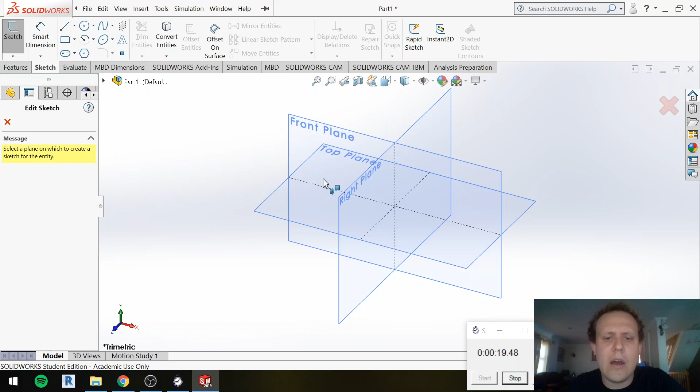I'll start with a rectangle. This will be my front and back. Oh, no, I don't want to do it on the front plane. Let me exit the sketch. Okay, so again, I'm going to do a rectangle. I'm going to do it on the side, the right side, because I'm going to make this my front and back. Jump normal to, draw my rectangle, dimension it. So this should be 2 inches. And this should be 1 inch.

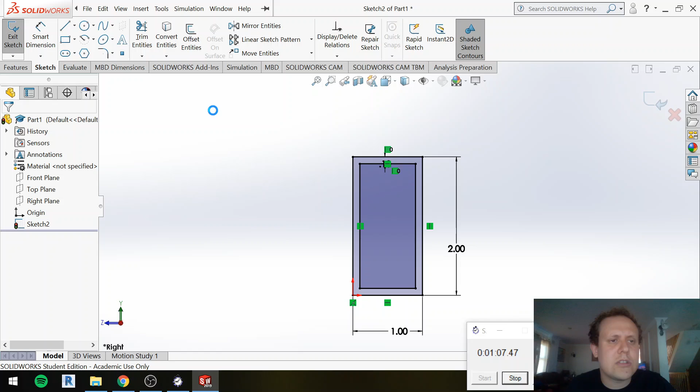And then I'll offset the rectangle by 0.1 inches because that is the wall size. And I want to invert that. So reverse, check here, and there we go. I have my inner piece, and then I'll extrude. And since it's the front and back, I'll make it 30 inches long.

Okay, and then I have kind of the base of my VersaFrame, and then I want to put holes in it. Oops, that's not what I want. Jump to the top view. I want to put those VersaFrame rivet holes, so I'll draw a circle. I'll sketch on this plane. I want it to be in the middle here, so let me zoom in a bit. Snap to the midpoint.

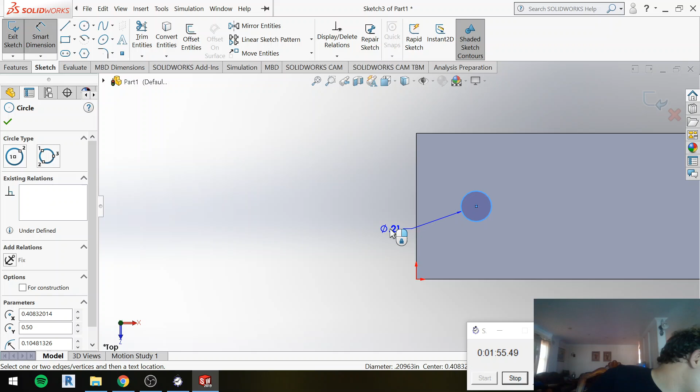Dimension it. I have written down here the size of those holes is 0.16 inches, and then they should be an inch from the corner here. It could be an inch or half an inch depending how you cut it. I'll make it half an inch because it'll just make the other end line up nicer. Half an inch. And then I want to make more of these before I extrude it through.

I'm so used to controls for other programs, I've forgotten how to pan. But I remember my hotkeys, which is good.

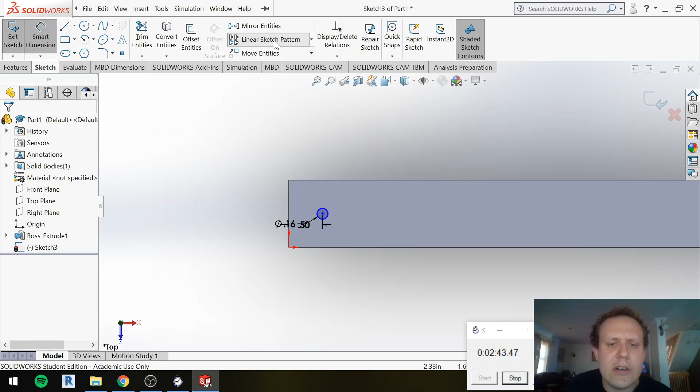Okay. And then I want to pattern this. So linear sketch pattern. I'm going to pattern it just like this. I'm going to space them 1 inch apart because that's what it is on VersaFrame. I'm going to have, I believe it's 29 instances. Let me just zoom out so I can make sure it goes all the way to the end. Oh, no, 30 instances. Yep, that looks right. Spaced 1 inch apart.

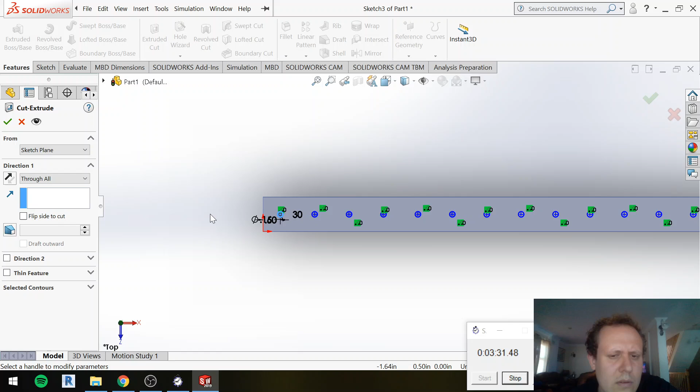Looks good. Check. And then what I'll do is I will extrude. Ooh, no, I don't want to extrude. I want to extrude cut. So I want to go to features, extrude cut. I'll just do through all. Let me rotate to make sure it's going through. Good. And it selected all of them. Excellent. I'll hit check. And then my front VersaFrame is donezo.

Okay, so I'll save that. I created a folder for myself here. What did I call it? SolidWorks DriveTrain. Let's make this part called 01 front and back rail. Okay, save that.

And then my side rails are going to be pretty similar to this. So let me also just kind of work off of this as I create my side rails, just as a time saver. So I'll save this as 02 side rail, or left and right rail, whatever we want to call it. So now I have two files, which is very convenient. I can go to my desktop and see that I have two separate files, and I'm working on the left and right rail now. So it's just like an easy shortcut.

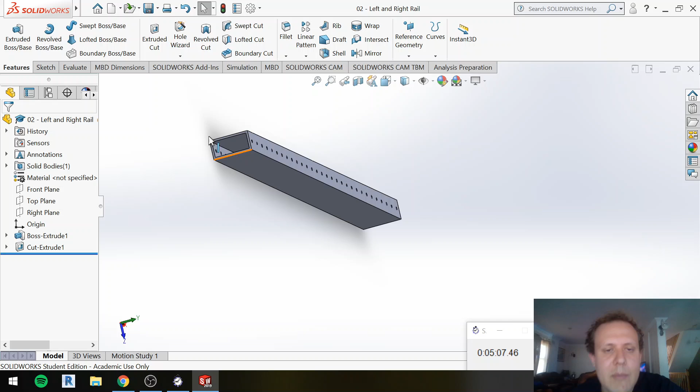Okay, now I need to shorten this to 28 inches because I'm going to have my front rail up here and my back rail here, and the side rails fit in between, so it's going to be 28 inches long. So let me cut off an inch on each side, or just cut off 2 inches from one side. So sketch, rectangle on here. Ooh, that started in the wrong place. Start that again. Up here. Dimension this guy.

2 inches long. And then go to features and extrude cut this through all.

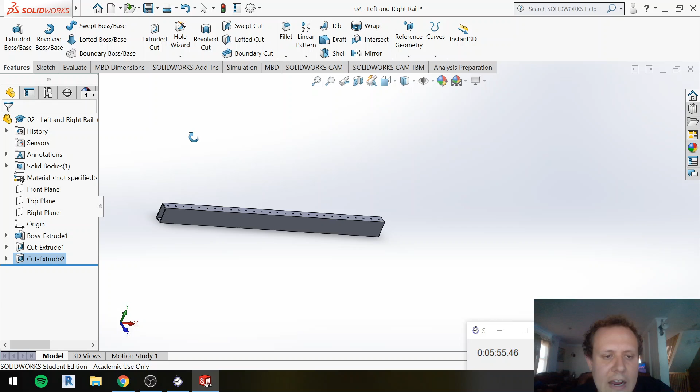Okay, now my side rail length is good, but I need to put bearing holes on the side here. So let me draw some circles. I'm going to need 3. I'm going to make a 6-wheel drive. So I'll draw 1 to start and pattern it. And the size of this hole should be the size of a bearing hole, which is 1.125.

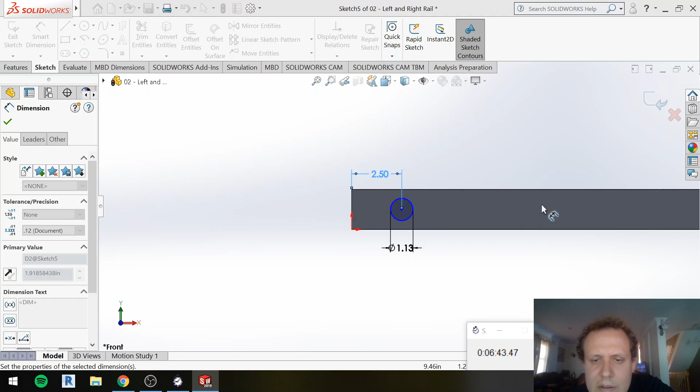And then I will space it. My plan is to use 4-inch wheels for this. So I'm going to need to space this at least 2 inches apart. I'll give it a little extra, so I'll set it at 2.5. And then what I'm going to do, I could linear pattern this. I could mirror to the other side.

I'm going to draw a construction line because I want to do that here. So right in the center, draw a construction line. So that has no impact other than it's a construction feature. And then I will mirror this guy about this line. So I have a hole on the other side. And then I'll just draw a circle here.

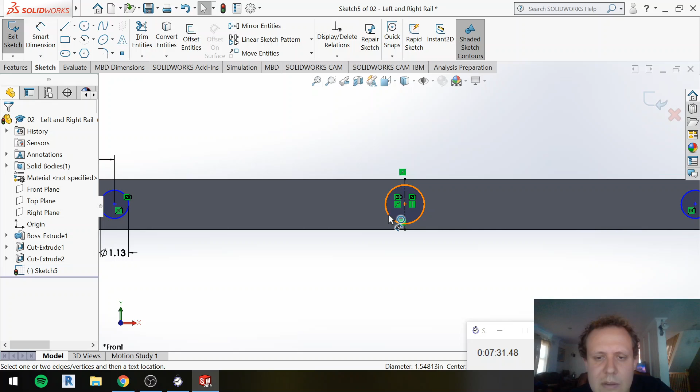And then I would actually like these two to be equal. See if I can remember how to do this in SolidWorks. I'll just set its dimension. I forgot how to do it in SolidWorks, unfortunately. Set all of them to be equal. Okay, cool. The mirrored ones will automatically be equal. Extrude, cut those 3 circles. They're all in one sketch, so it'll be easy to cut through all.

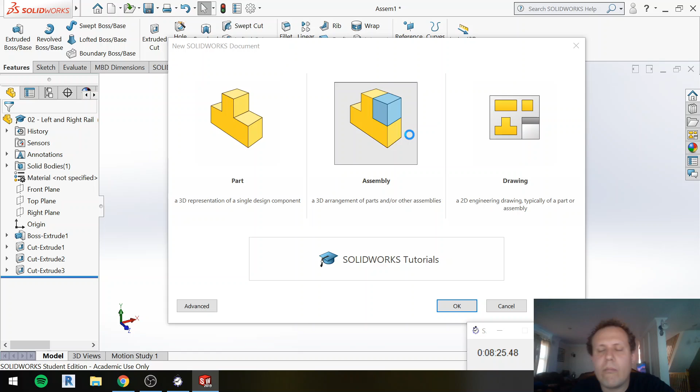All right, so I have my side rail set up. Now I can start working on my assembly a little bit and put these rails together, and then start working on importing the wheels and such. So let me start, new, assembly, processing.

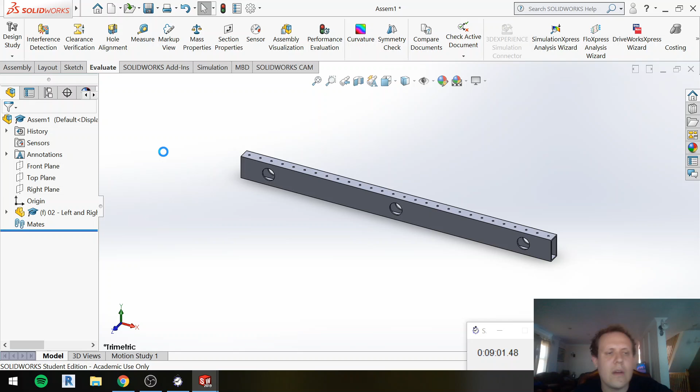Okay, before I start importing stuff, actually I can just import the side rail. Why not? Place it. Let me just save this really quick before I do anything else. Name it 00 SWDrive. Okay, so I inserted that side rail. Let me also insert the front and back rail. Okay, I'll constrain these two to each other, I guess mate.

So I'm going to want, actually let me fix this guy in place before I do anything else. Where is it? Is there a way to fix in SolidWorks? I'm forgetting now. It's been so long since I used this. I'll just leave it in place. Okay. Let me mate some stuff.

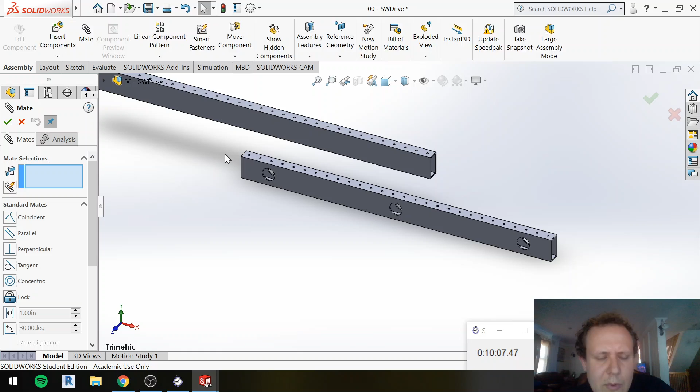So I'm going to mate the tops of these to be coplanar. I'm going to mate this face to that face. There we go. And hit enter. And then I want to mate this face and this face, but it's going to be offset by, I'm going to leave 3 inches because the wheels are about, well, 3 inches. So for this distance, I'll type in 3, but I need to flip it.

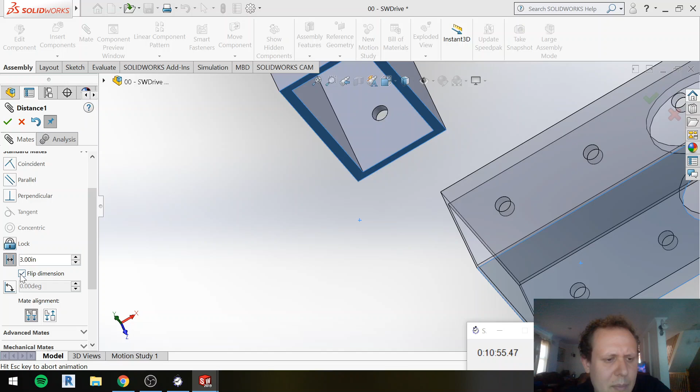Okay. Cool. Now these two should be fixed because I have 3 mates between them, so I should be all good. Okay, good. Next, I will put in the other ones. I'm going to create some planes so I can mirror them. Front plane's there, top plane's there, right plane's there. Got it. Okay. I'll just type in search commands plane.

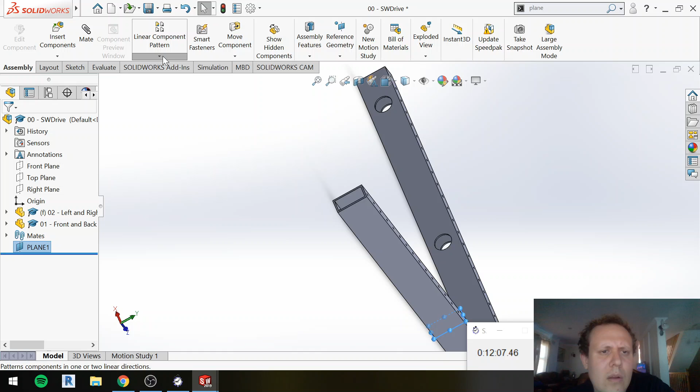All right. So I'm going to put a plane halfway between here and the other side. So I'm going to have a nice mirror plane to work with. All right. And then I'm going to go assembly, mirror components. Okay. Plane's auto selected. That's what I'm going to mirror. Hit check. And then it puts the other one, and it's going to be already set up for me, all mated and everything.

And then I need one for this front and back rail, so I will create another plane. Halfway between here. And I can just click on this. There we go. Hit check. Mirror this guy to the other side. Okay, we have kind of a chassis. Now we need to start inserting the wheels and the gussets and stuff.

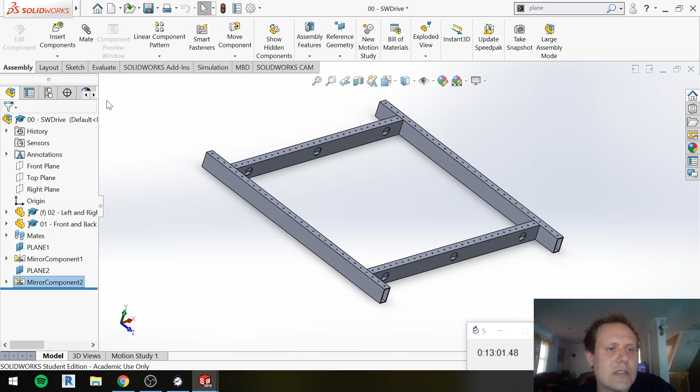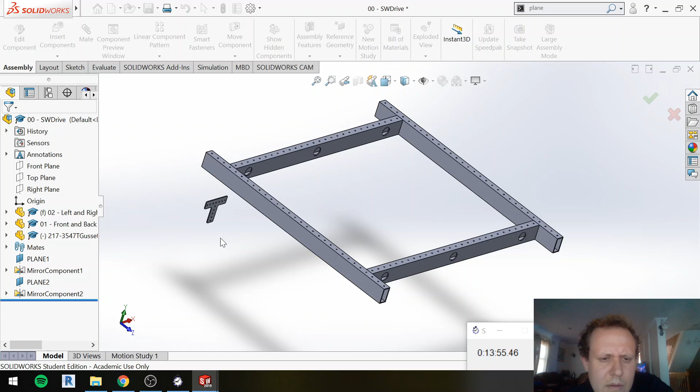Okay, so let me go and import my step files. I'll start with the gussets. Okay. All right. Okay, let me mate this guy into place. Flip that. Is that right? That looks wrong. I want to flip that.

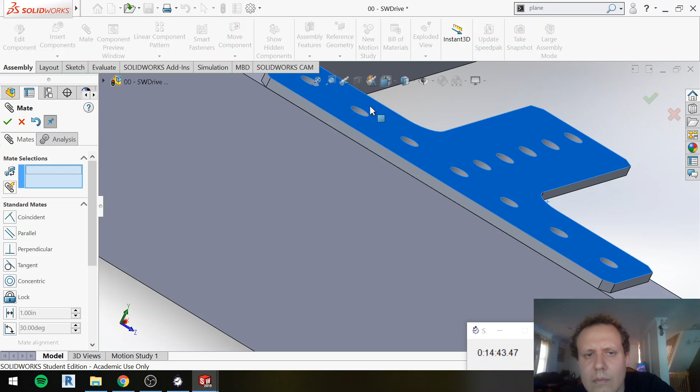Okay, good. Now let me do the following. Let me just get this and this lined. Flip. Start moving this guy into place so I can make sure the holes are in the right spot. I think this and this being concentric should do it for me. Cool. All right, so there's my gusset.

Now what I can do is I can mirror for my mirror plane. Let me select this one and components to mirror this guy. Mirror again. Mirror plane, now hit this way. Good. And then I'm going to need a new plane because I need to put gussets on the bottom.

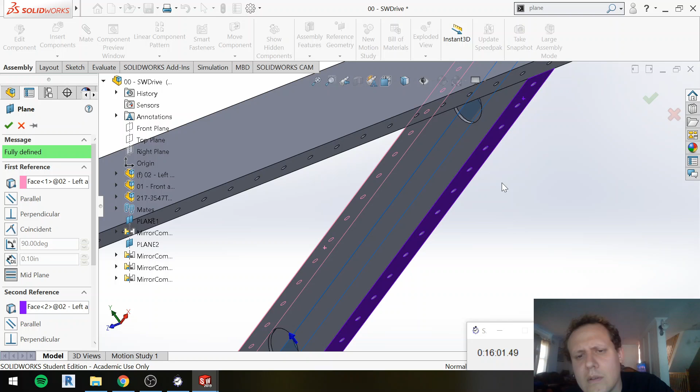Okay. Okay. Now we have gussets on the bottom. Very good. Let's decide what we want to put in next. Let's go to our step files. Let's do our bearings. Okay.

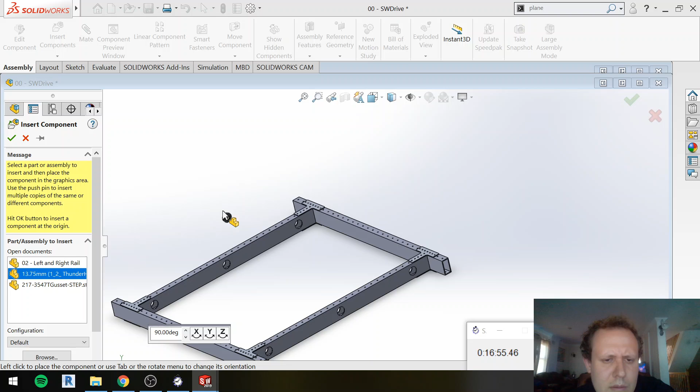Okay, let's put this guy in place. And then we can mirror them all over the place. The gearbox is going to be on one end, so I'm not going to put the bearings on that end. Actually, let me do the gearbox first before the bearings. So I'll just leave the bearing floating in the corner there, and I'll put it in later.

I'm going to use a 3 CIM ball shifter, as we usually use, with the West Coast Drive third stage. And I will put it at a far end of the drivetrain, again, like we usually do for our robots. This will probably take a non-short amount of time.

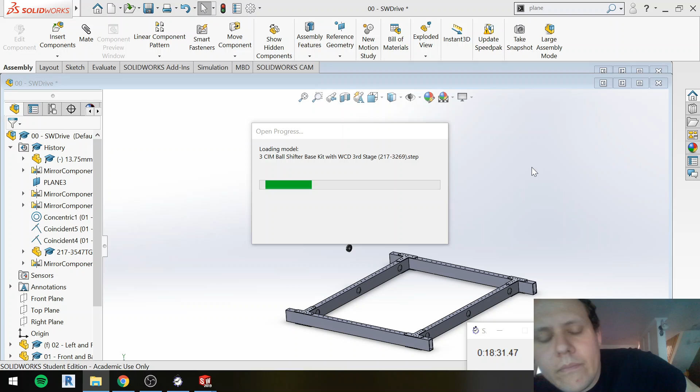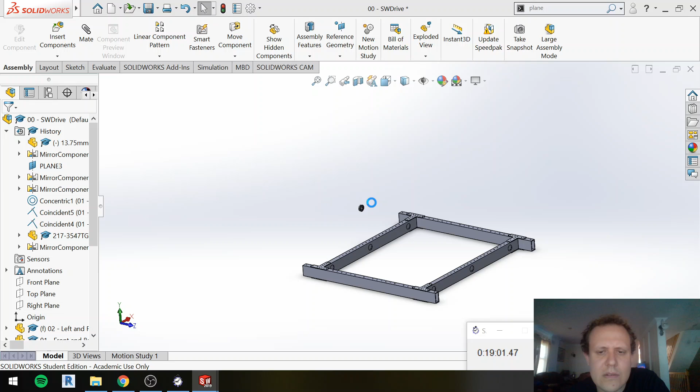Okay, here's my gearbox. Cool. Let me go back to my drivetrain, save real quick in case anything crashes. Insert ball shifter. Okay. And let's put this guy into place. So I'm going to put the ball shifter in. Ooh, I might not have left myself enough space. We'll figure it out. I'll move some holes around if I need to.

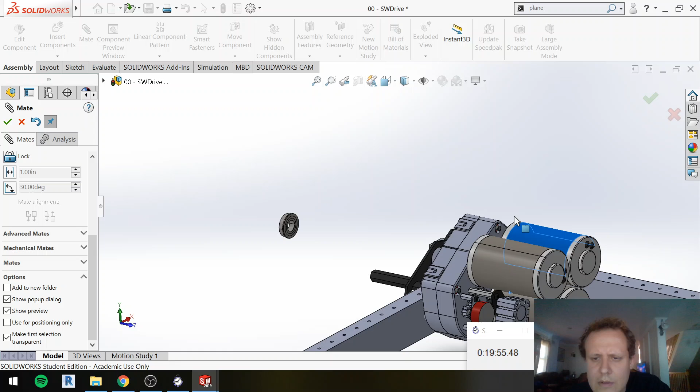I want to make this concentric with that. And I want to flip it around, if it'll let me. Cool. This should be able to drag this way. Zoom out a little bit. How can I set this up? I can't set it up this way. I have to have it rotated up like this. Or down. No, this way will work. I think this will fit. I hope this will fit.

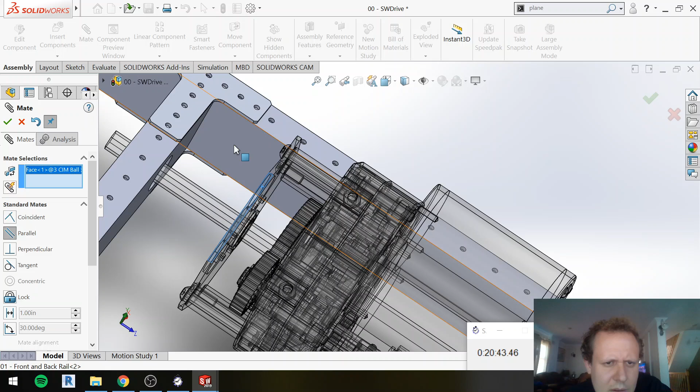Okay, let me make some stuff parallel, so we'll see how everything looks. So, mate. I'm still in mate. What's flat here? Anything? This is flat. Looks like this face. And I'll make it parallel to this guy. And let me flip that. See how that looks. And if it's inside, I'll just change my side rail. Oop, that's not what I want. I want to flip it all the way around. Let me go back into that most recent mate and edit it so it goes in the right direction.

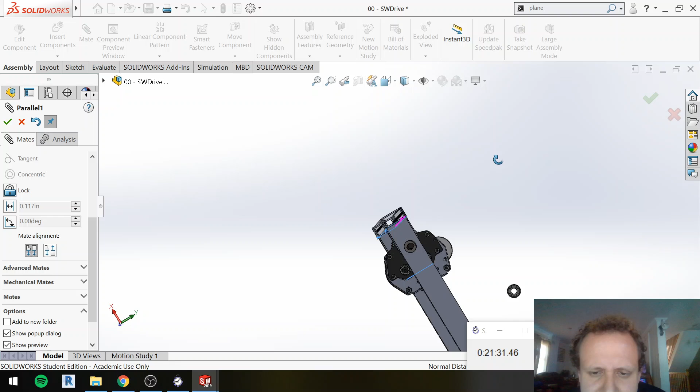This is not what I want, is it? I guess this is what I want. Okay. I feel like this is not going to work right if I do it this way. But I do know I will have this mate to that, and that I'll have a bearing flush in there. I just want to do a quick measurement, make sure that this won't be on the ground. I feel like it will be. Yeah, it will be. So I'm going to change this a little bit.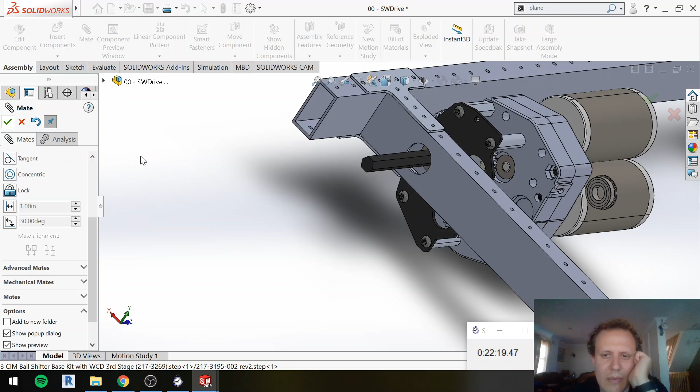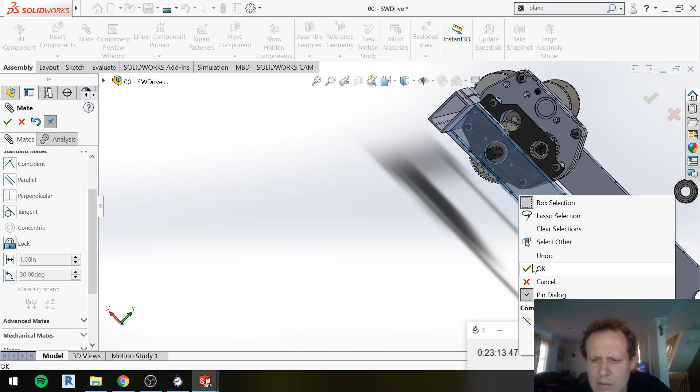I'm going to move this hole in a bit so that things line up a little bit better. So I'm going to edit this guy because I don't want them to be parallel anymore. Perpendicular is what I want them to be. I want it facing the other way. Put -90, that'll work. See what that looks like. Flip. Okay, that looks much better. And then I'll just change the location of this hole in the part. Let me finish this. Looks like it needs to move an inch, should do it.

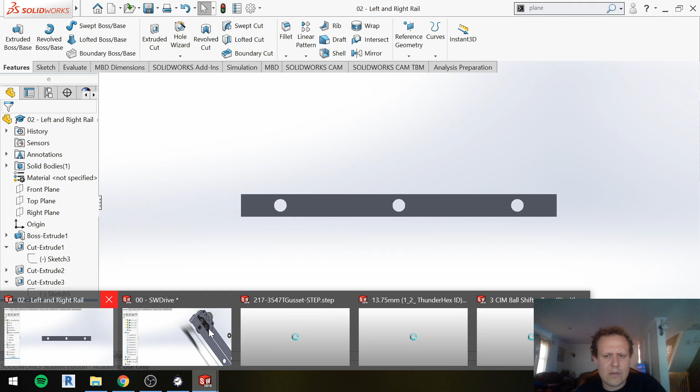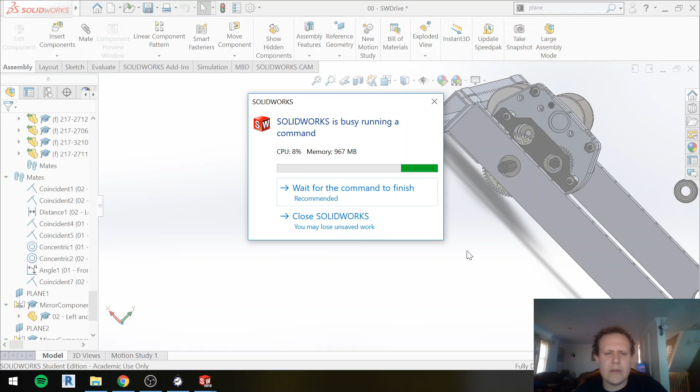Okay, save. Close this guy. I'm gonna close the stuff that's bound to crash everything. Do I want to update my main assembly? Yes, I do. Okay, that looks much cleaner. Let me close all these guys. Okay. Okay, we're good now, I hope.

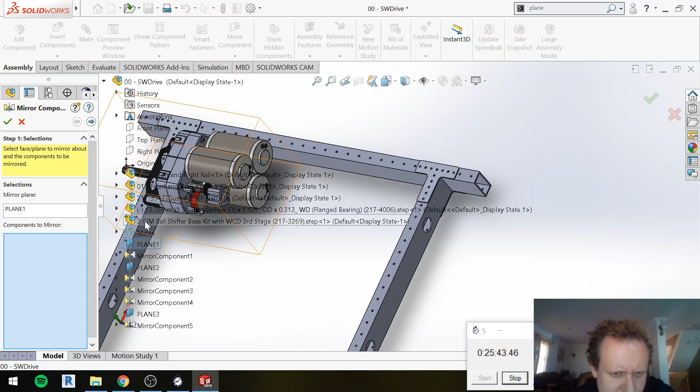All right, now let me mirror this gearbox onto the other side. First, I'm just going to check, make sure nothing's colliding. Okay. Mirror plane. I believe it's plane 1. Components to mirror. 3 CIM ball shifter. Oh, that's a problem. I guess I can't mirror it. I wonder if I can. No. I guess I'll have to insert another gearbox. That's a little annoying.

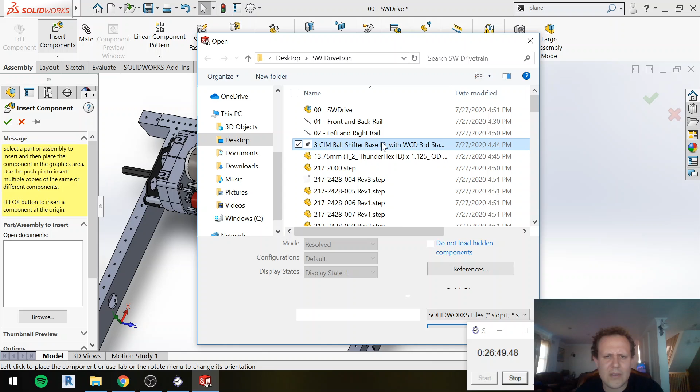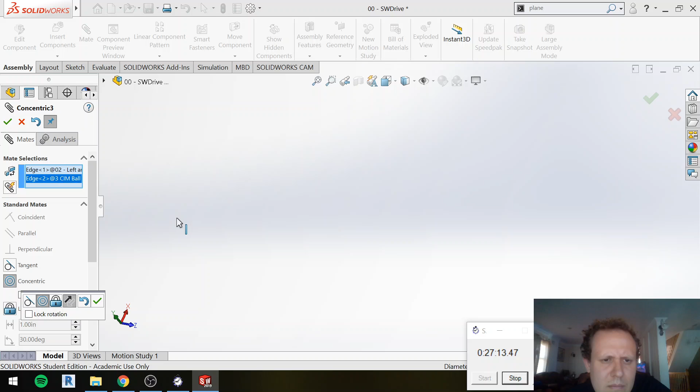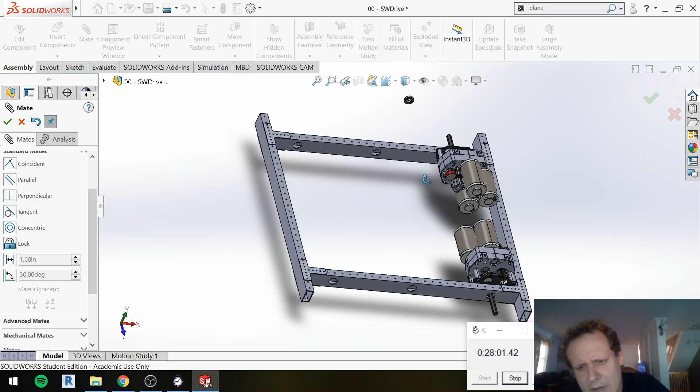Okay. Gearbox looks good. All right. Nothing's colliding. Now time for the bearings. So I'm going to put this bearing flush against this wall. Flip it around. And then make it concentric with this hole. Okay. Now I can pattern it to the other side.

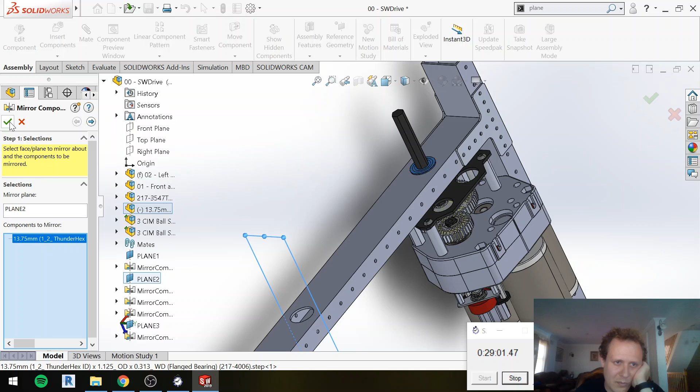Mirror plane, I believe, is plane 2. Better to have renamed these, but at this point, I'm in too deep. Okay, put a bearing on the other side here, I hope in the right spot. Cool. Now I can do what I want to do. I need to make another plane. Hooray! Planes are my favorite. Okay, one here, and one here. Mirror this bearing.

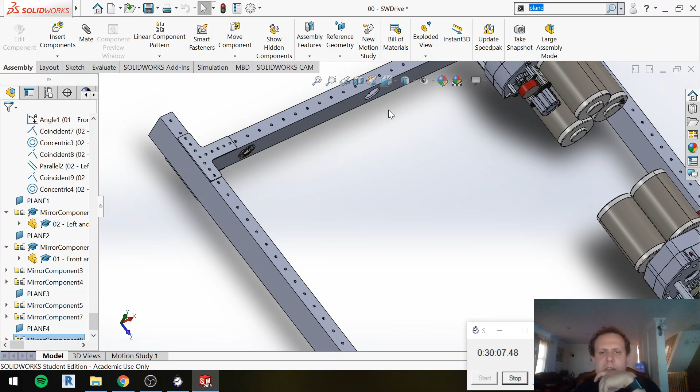I could just linear pattern bearings here, but I almost don't want to do that because if the location of stuff changes, that's not the best. Wonder if I could put a plane between the two holes. No way, right? No, that's terrible. All right, I guess I'll just linear pattern it, and if something changes later, I'll have to deal. Direction this way.

Instances. Spacing. So I spaced it 3.5 inches from the end. The whole thing is 28 inches. Half of that's 14. 14 minus 3.5 is 11.5. No, 10.5. Let's see if that works. Components to pattern. Uno. Dos. Yeah, that does. I need to make the number of instances two, actually. And change the direction. Here we go.

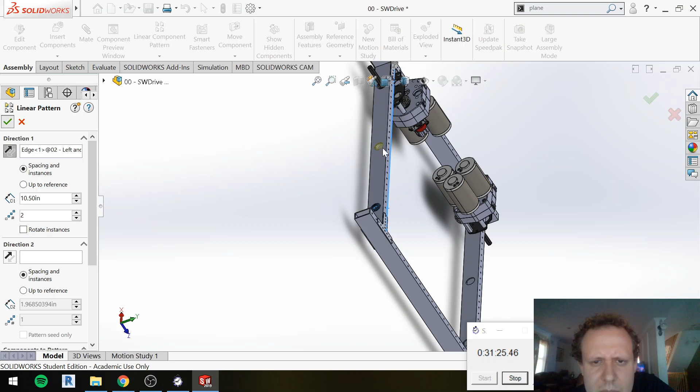Okay, now that I have all the bearings on one side, I can pop them on to the other side. Mirror plane. I believe it's plane 1. Again, I usually rename these at the beginning to make my life easier, but for some reason I just didn't do that. I am remembering them pretty well, so that's something. Now they should all end up on the other side, just right. Okay, good.

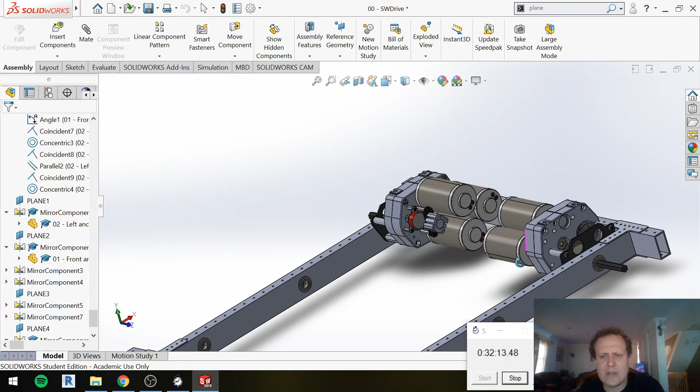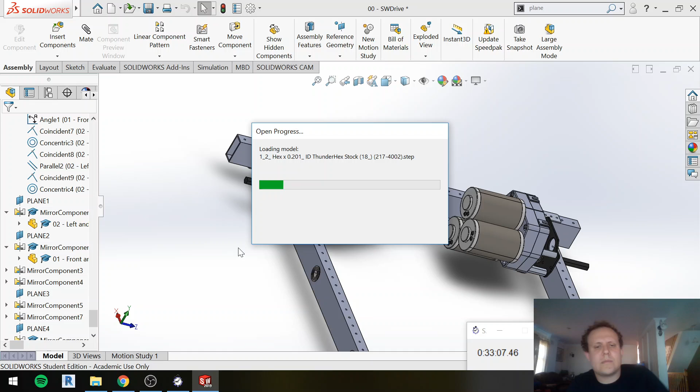Okay, now I need to put in some hex shaft, and I realize I didn't prep that, so let me go and get some Thunder Hex ready. Thunder Hex. CAD files. And I want these hex shafts to be 3 inches past on one side, an inch. I think 5 inches should be long enough. I can always change it later. So it's already 18 inches. So I will cut it down.

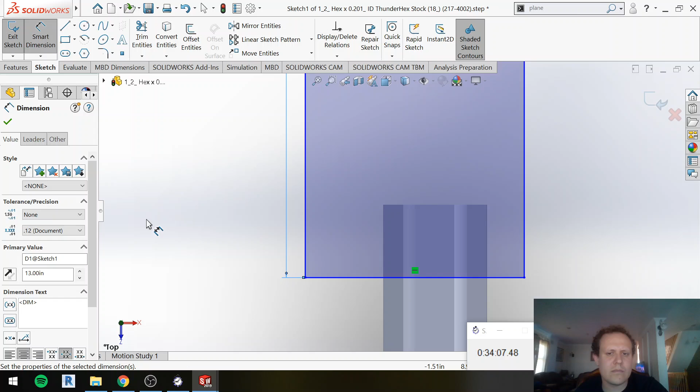Not being very cooperative, are we? And I'll just overshoot here just so I don't mess up, because all I care about is this length. So it's 18 inches right now. I want to take off 13. Wrong way. So I'll set this distance here. I guess I could have just made them coincident, but whatever. Okay. Extrude cut through all. This is a little bit gnarly the way I'm doing this, but hey, it works. I hope. Yep, it works.

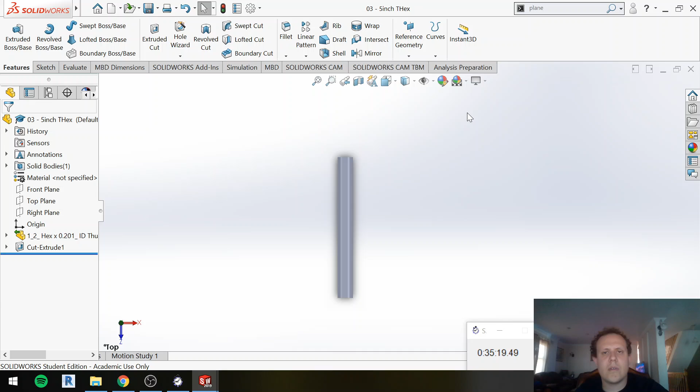And then save as 03 - 5inch THex. So make it lowercase. X. All right. Insert Thunder Hex. Okay. And then put one in place and then mirror it. So make this concentric with the bearing. And then I'll have the Thunder Hex just extend all the way out to here.

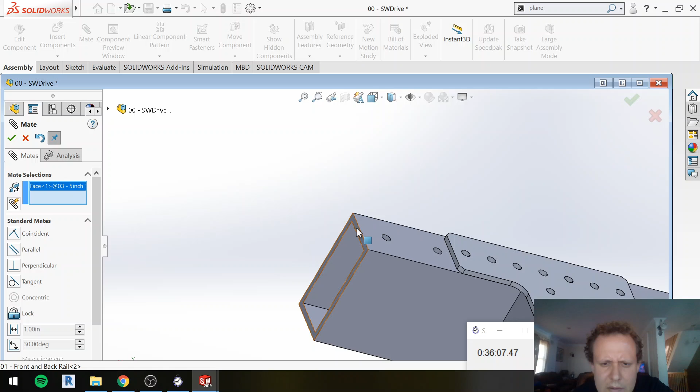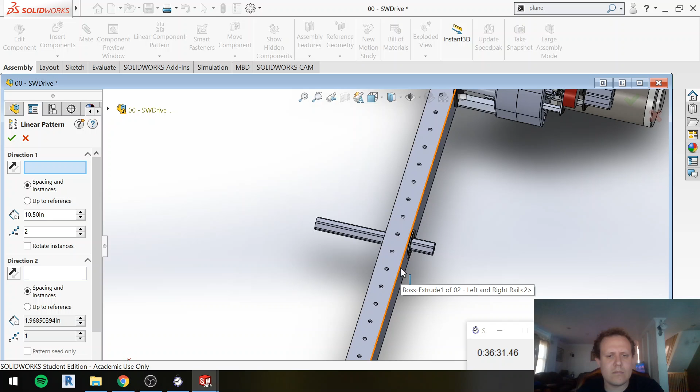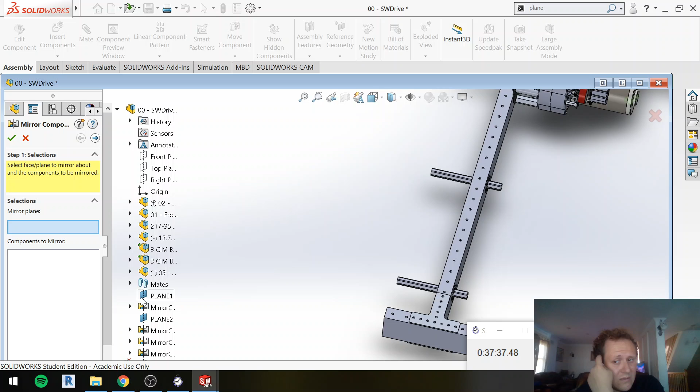It would have been smart for me to have linear patterned this with the other thing, but done is done. Oh, I haven't selected the component to pattern. That's why it's giving me an error. Okay. All right, we're good. Thought I saw an error there, so I'm just going to go to the top and make sure there are none. No, we're clean. Good. Let me close this all up because it's getting messy. I don't like that. Okay. And then I will mirror these to the other side. I could have done these all together if I planned this a little bit better, I can make it much cleaner.

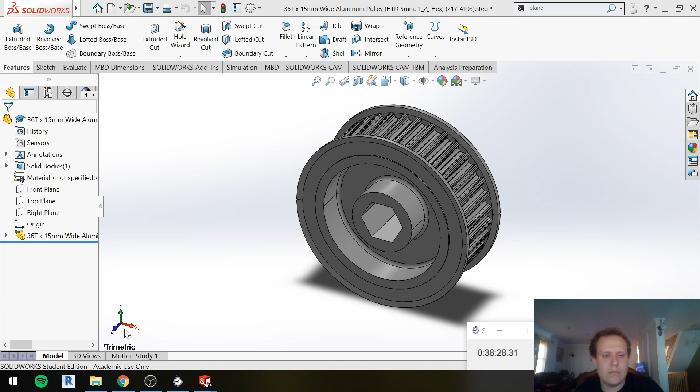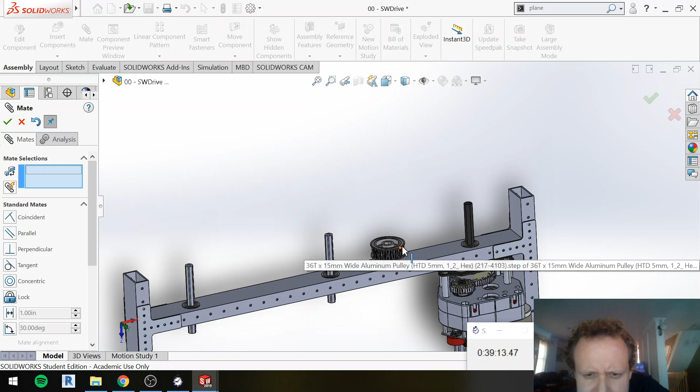Okay. Now let's do pulleys. Is this it? It's the bearing. Pulley. Here we go. Don't know why that took me so long to figure out. There's the pulley. Okay. So there's going to be one pulley. What I like to do is make sure I'm selecting the outermost point of the pulley, which I guess would be this, and I'm making it flush with that. And then I will make it concentric. Zoom in a bit. There we go.

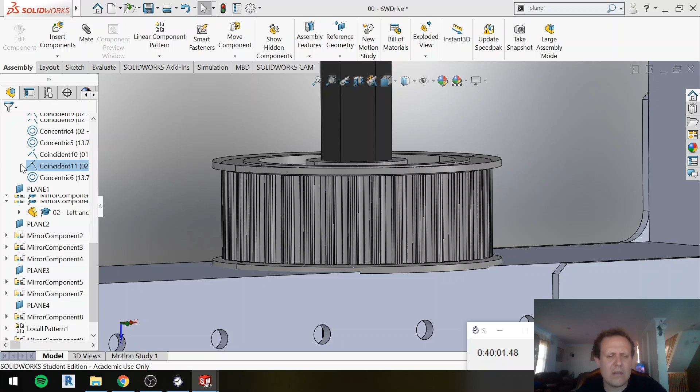With anything around here. Is this Thunder Hex? No, it's not. ThunderHex is a VEX. I don't know if it is a VEX. And I probably actually want to go back and give this a little space because I put them just right on top of each other. And I didn't select the most far out point. So I should just delete that mate entirely and clean it up. For something like this, I would put a 3D printed little spacer in there. I wouldn't put these flush against each other like that, but for what I'm doing here, it's okay.

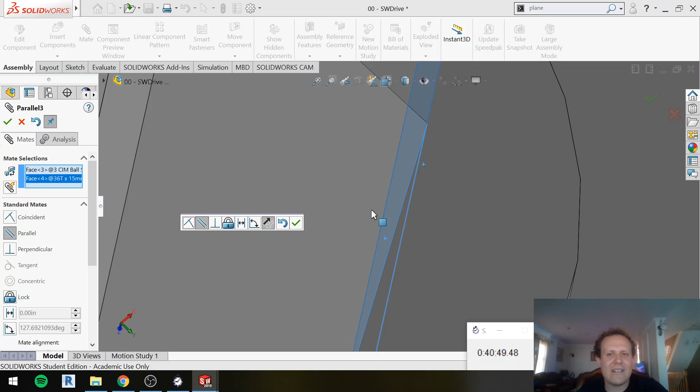I'm just going to do this. I will make this and this flush against each other. That should do enough to space it out a bit. I normally would set up the hexagon to line up because I'm crazy like that. I want to do it because I'm talking about it. It's such a stupid little thing, but just lining it up just makes me happy. Now they spin together. Isn't that nice? Okay.

Then I'll do the other ones here. So there's going to be one here, one out here, one here. Or I could just put two here, obviously, but I'm not going to do that. So let me linear pattern. Oh, I hate that I'm coming from different directions every time I linear pattern. That's really not the best. You could also do a thing, I think, where you squeeze a pulley in here, but I'm not going to mess with that for this one. Direction, components to pattern. Good.

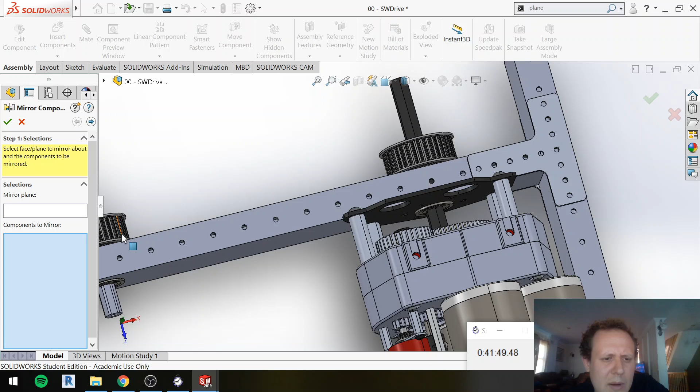Then I'll mirror this one. Ooh, that's not my mirror plane. It's my component. My mirror plane, I believe, is like the last plane I made. I hope I'm on the right side of this thing. Yes, I am. Awesome. Rather be lucky than good.

Cool. And then linear component pattern this direction, this guy. Cool, that should be all of my pulleys. Now I can mirror them all to the other side.

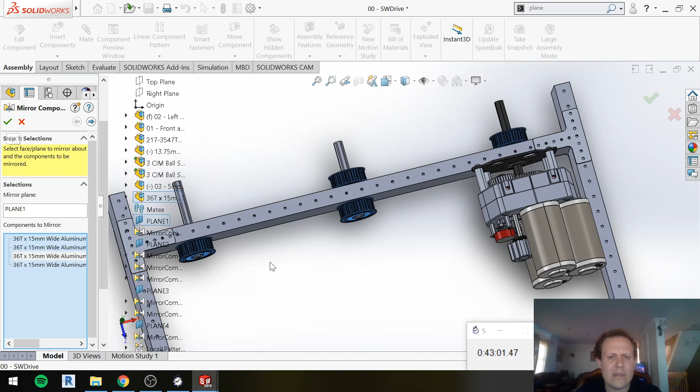Oh, interesting, it selected those last two for me automatically. Select more things. These two are already selected, awesome. Okay, and then for my mirror plane is plane 1. Okay, cool. So belt runs here to here, here to here, here to here, here to here. Very nice. Time for the wheels.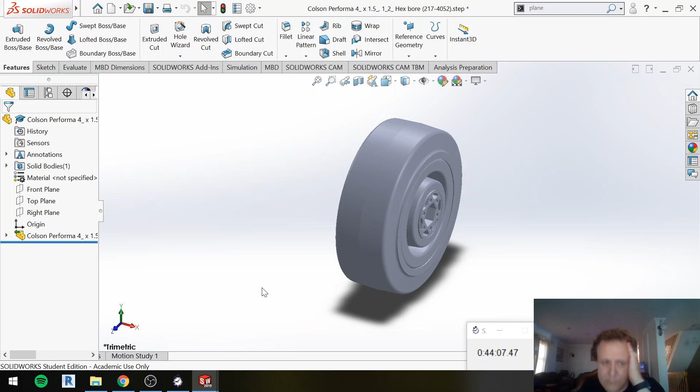Starting with the middle wheels, which will be my Colson Performa wheels. Okay, close this pulley. Okay, insert component, Colson wheel. These are 4-inchers. I just ended up using 4-inch because annoyingly, Vex Pro does not have 6-inch Colson wheel CADs, and I didn't want to go through the headache. But I could use 6-inch ones with Onshape because I of course have those parts libraries.

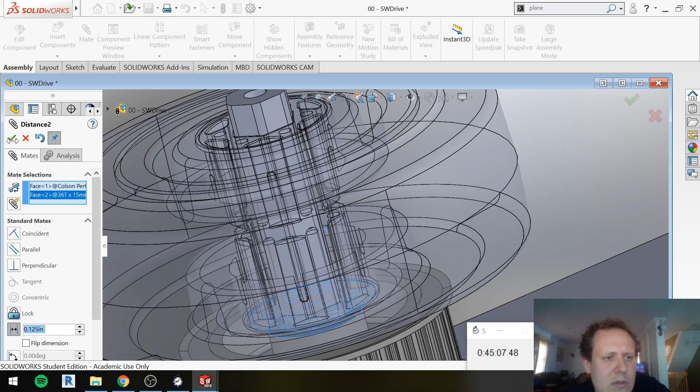I'll offset these by just a little bit so they're not right up against each other. Again, I would use a spacer in real life, but I would put the spacer in the CAD as well. But we're just not going to go all out with this. I'm not going to put in belts. I'm just showcasing the differences here. I'm just making something that would be enough to construct. Components to mirror, plane, I believe is plane uno.

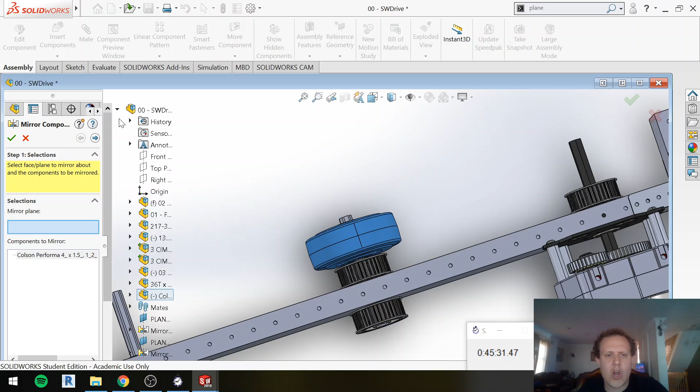There we go. Next is my Omni wheel. And then I should be done. That's all I'm going to do on this. Omni wheels usually take a while because they have all those little rollers, so the more features means more time to load.

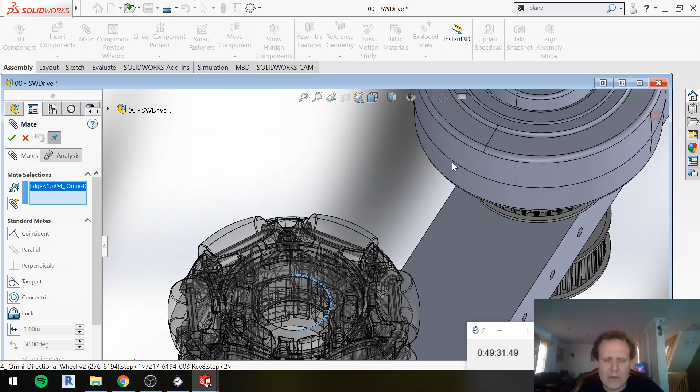Okay, cool. And I just realized when I loaded this Omni wheel that it is missing the Versa hubs. So I'm going to need to incorporate those as well, which is annoying. But if we were using Onshape, it would already be there in the library for me. It's not usually quite this slow, but recording everything is definitely slowing down my computer a bit.

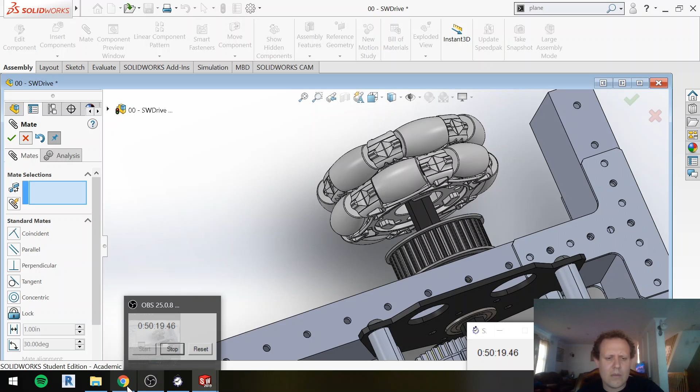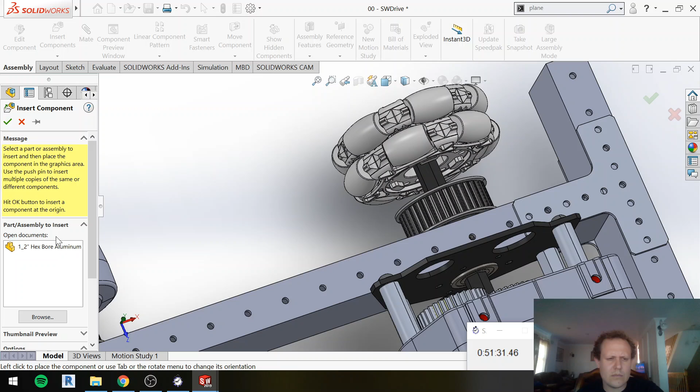Let me find the Versa hub. I want to get this in under an hour. Explorer, there we go. This shouldn't take as long. I'll close that Omni wheel. Actually, the Omni wheel part's probably not helping with my speed right now. That's not what I want.

Okay, Hex Hub installed. We'll just put one on the other side. I could always mirror it, but I'd have to create a plane. It's probably easier just to insert this guy. That's not what I want.

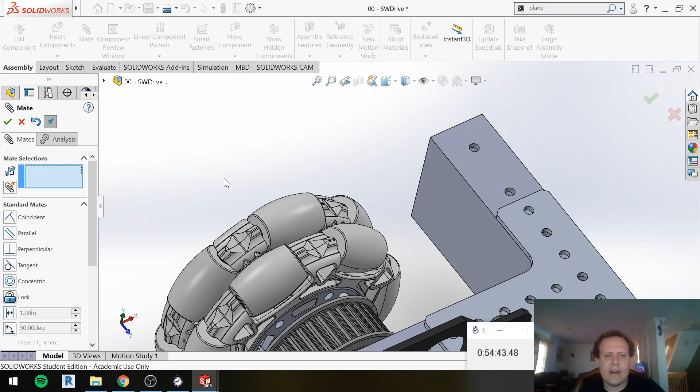Okay. Let's make this guy, and give them 1/4 of an inch. All right, at last. All right, now let's pattern this guy to the other sides, and we should be done under the hour mark.

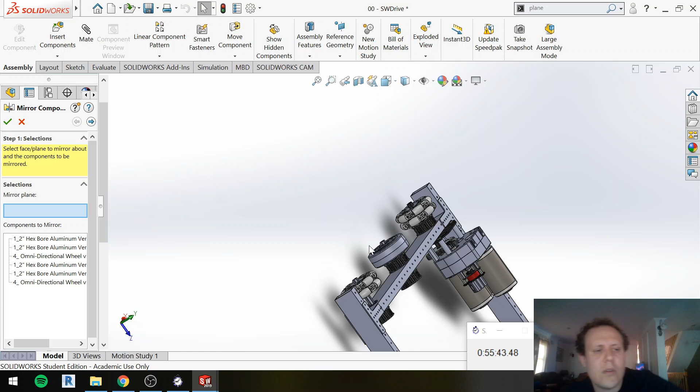Components to mirror will be all 3 of these. It's not letting me. Here, I'll find you. And then I believe we are looking at plane number dos. Zoom out a little bit. To make these in line, I would have slid in a spacer in this area. Okay, last step. Whew. Home stretch. Okay, at least it auto-selected all that stuff for me, which is great. That's a big time saver.

Okay, and we are done. Let's hit the stop button on this guy. 56 minutes, 55 minutes, just under an hour to do this guy. So, you know, for a drivetrain, not too bad. Definitely had to deal with a lot of nonsense to get this finished in terms of just waiting for stuff to load. But, you know, it's not the worst.

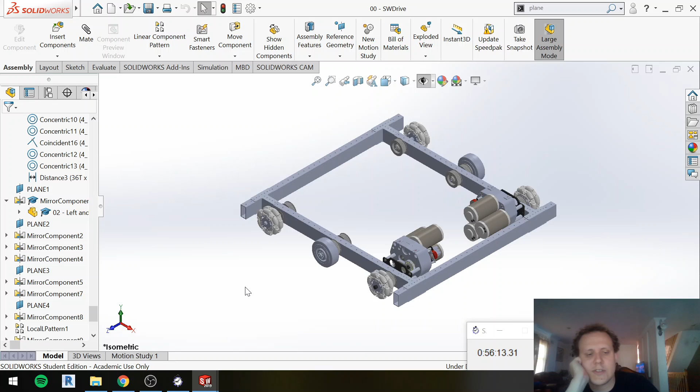Now, if I wanted to get this uploaded onto GrabCAD, I'd have to move all the files into a GrabCAD folder or share the folder I've created on GrabCAD, which is not the end of the world, but can be a little bit irritating. I'm not going to do that right now because you guys already know how that works, and you know kind of the annoying parts about it. Okay, here we go. Yeah, so that's it for the SolidWorks portion. Next, I will be doing the same thing, but in Onshape.